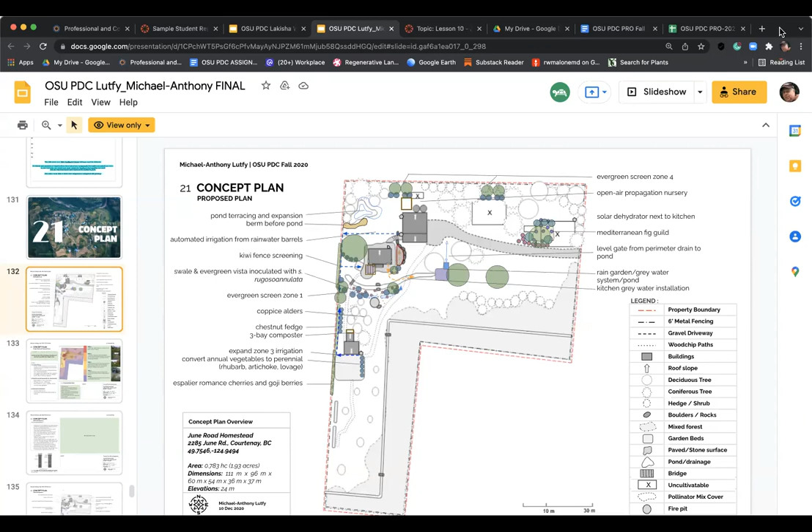Let's just take a look at a couple of examples. So this is one of the past students we had, lives on Vancouver Island here, up in Courtenay. And the first page - you're going to notice, and this is something we're going to be working towards shifting - is some of the examples are not really complete based on the rubric. So I don't see there's a proposed plan, we don't have a look at the existing. So you'd want to place your base map in there prior to your concept plan. But just in terms of a concept, this is a really good example.

So it's showing us some evergreen screening, a little nursery area, some solar dehydration. I won't go through all of these things, but you can see they're fairly general, right? We have a pond, some irrigation out of some rain barrels. Here there's a kiwi fence screening, so that's nice that there's been some specifics placed in that. A little swale and evergreen vista inoculated with mushrooms and some coppiced alders.

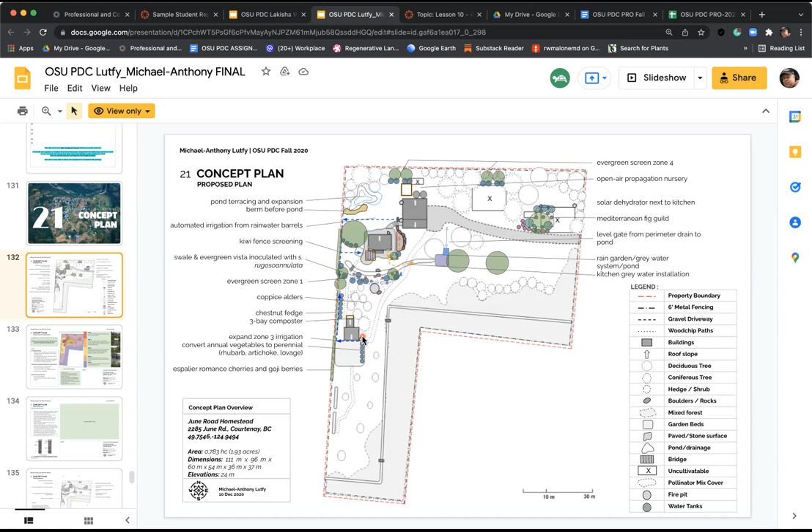So you can see the plan itself is fairly general, and that is in essence what a concept is - we're just looking at that big picture. What are we trying to do here, and where are we trying to do it? You can see here there's a list of the goals and the proposed zones.

We'd have to go back to this person's earlier work to see if this has changed remarkably. But it's very interesting to see right here, this is what we ideally want to see, where we have the main dwelling and zone 1 is tucked in and around it. It can extend out from it for sure, but we wouldn't want to see zone 1 cover this whole area. I think that's going to be a stretch for the homeowner.

You may find that whatever you create in your design here, if you were going to implement it in your own home, be open to some change. This could change quite a bit as you start to assemble it. And I know for myself, having done this a fair bit over the last two decades and more, one of the things that would freak me out most is a client loving a concept and wanting no change. So I like to be given an opportunity to make small changes as we go through. And even when we get into the construction end of it, it's great to have some flexibility. That's a whole topic on its own, the construction, it'd be a whole class on its own.

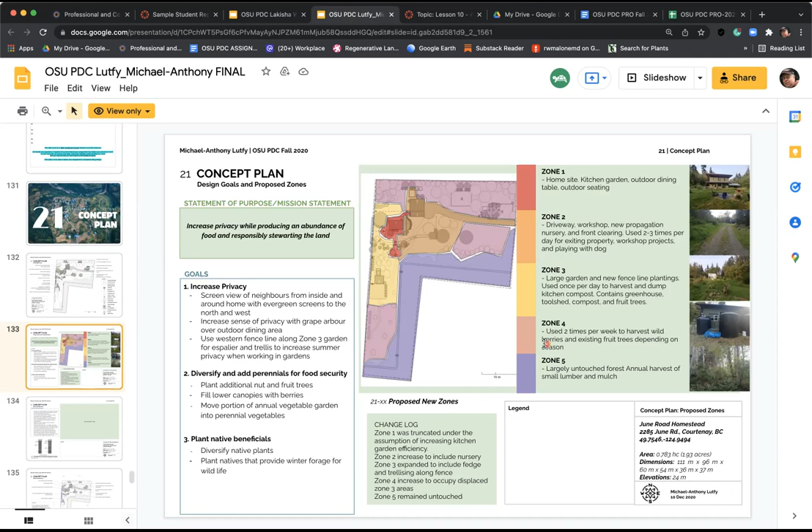Again, this is a nice depiction with some pictures showing zone 1, 2, 3, 4, and 5. So that is wonderful. There's a little bit here on water management.

They've indicated that they want you to look at the next page, but there's some basics here. So 10,000 gallons of collection currently installed, that's very nice to have. And then all these other items - they want to slow water down, use gray water, micro irrigation, some berms, some ponds. So this is a nice strategy here.

And the one thing I'm sure you've all seen during the class is that we're not looking for silver bullets. We're looking for a diverse approach that's going to have a lot of resilience here. In other words, if one of these items had some challenge, you still got all this backup, right? And this has happened to me.

We have 12,000 gallons of rainwater storage, and one spring, all of our rainwater is pumped. We collect off the roof into a small cistern, and it gets pumped to our main storage that's up higher in our landscape. One spring we went to activate our system, and all our water was gone, which was rather shocking. So what happened is we ended up having a leak in one of our main irrigation lines. So if I back up a little bit, we had the water, I activated the system.

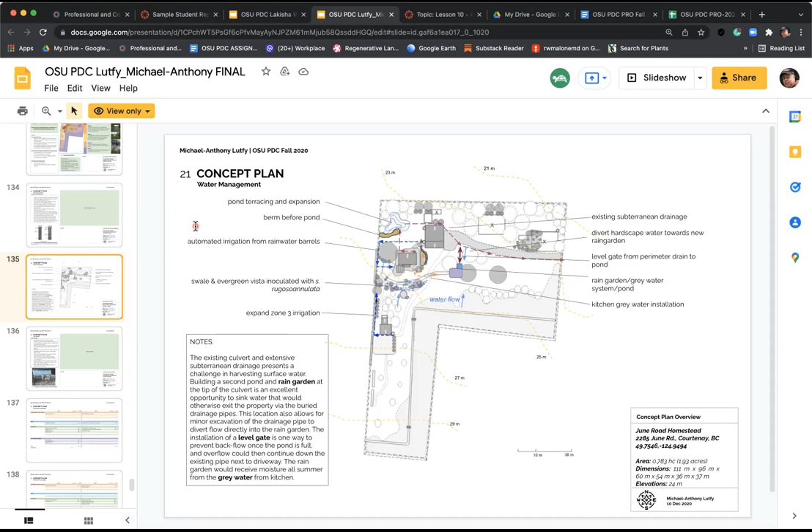You can see there's a lot of different strategies here. So this looks like they already collect rainwater and they're adding more to the mix. And then there's some notes here, some soil fertility plan - so they're going to start composting, and they've listed all these other strategies.

And then a phasing, they go through the various years - year 1, year 2, year 3, year 4. This is a really interesting exercise to go through, especially if you're designing your own property, just getting a handle on how can you execute this. Because especially if you're looking at a larger scale, like Marion, you'd want to do it all today, and that's just not possible. So having it laid out in at least a rough manner like this on how to phase it is really, really helpful.

And it's a good exercise to go through, because if you end up doing this as a professional, there's going to be expectations from your client as to, okay, you've done this drawing, now what? Where do we go now? So you can definitely give them an idea of how they could phase this in, whether it's themselves or whether they're wanting you to help them, if you offer that. And then we go into the permaculture principles.

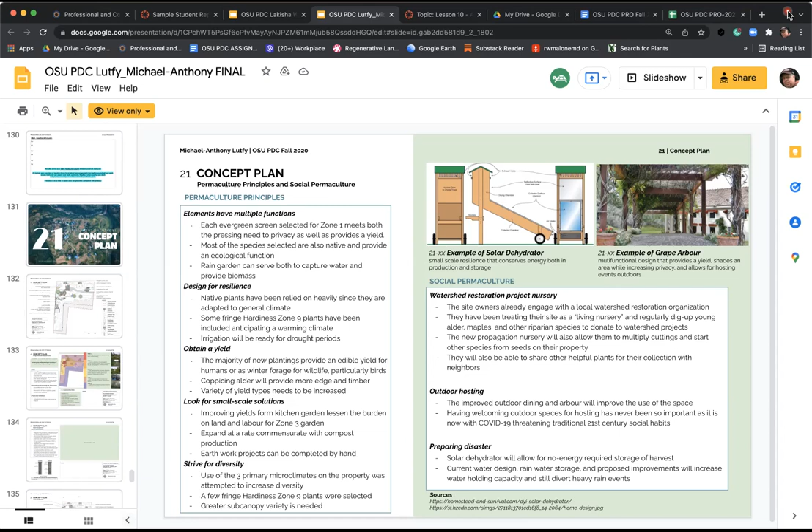And that is about it. They've included the social end here, so there's some good examples that you can reference. Again, be mindful that they may not contain everything the rubric is asking, and we definitely want to take a look at the rubric to be sure you're covering everything that's being asked for.

It does say we want your existing plan map, so put that in there. This is what I use to grade, so if you do not include that, and your concept is awesome as it wants, you'll lose half a mark there. Not that anybody's concerned with getting full marks—I'm sure everybody wants to just come away with the best possible concept plan based on all they've learned.

There are a few resources in here, I believe—a little bit about vision statements, mission statements, and goals, and then that timeline. So there's a little bit of help here if you need it. That's sort of a basic overview of the exercise or the lesson. And there are some questions here, so let's take a peek at some of that.

Okay, so Gregory had a question. I don't think Gregory's here today. Can you clarify zone 1? Is it a place you go every day, even if you're not maintaining it?

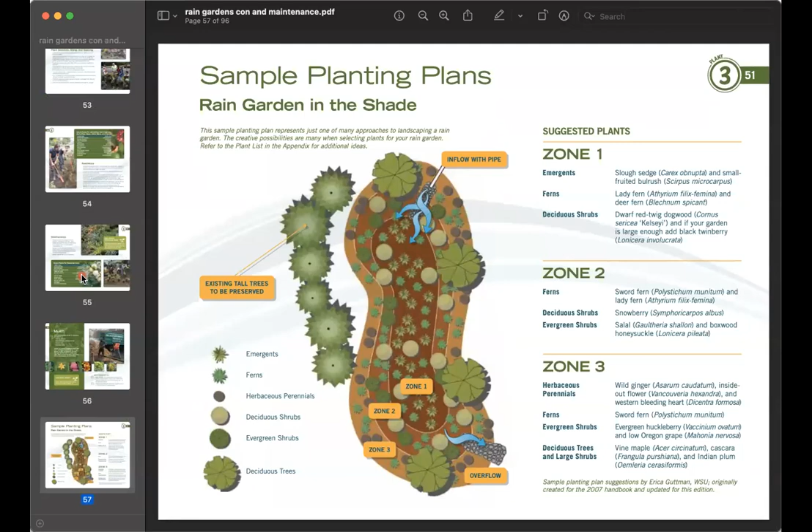Okay, sorry, there was determine sizing. Sorry, I'm flipping through this so quickly, but I am looking for one of the sheets here, which I'm surprised I can't find now. Oh well, I was talking about benefits, and I thought that would be handy for Gregory's question here. That is very, very odd. It's amazing we see some things that when...

Multiple benefits. But there we go.

Because once the contaminant's in water, there's actually no way for that water to purify itself. It needs compost or soil or microbial soil life to help lock up some of these hydrocarbons. So increasing the amount of water, reducing flooding, filtering these hydrocarbons, and habitat, and enhancing your landscape. So I hope that has helped with Gregory's question here.

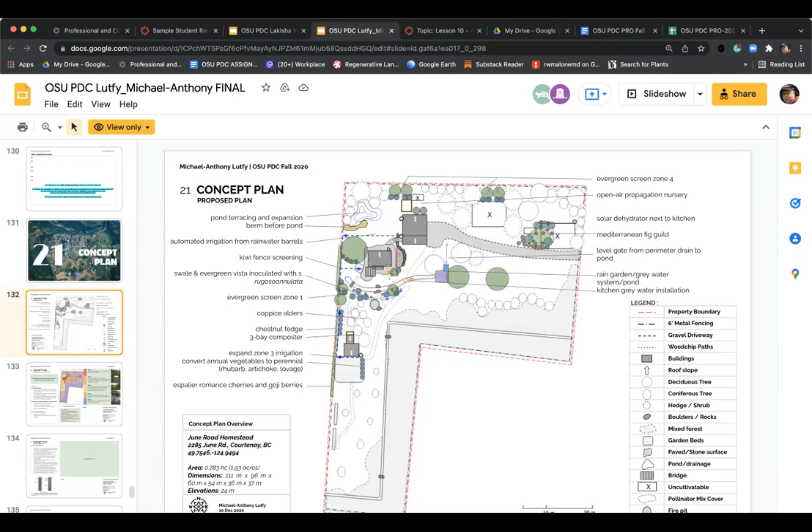Here's another, that's not as good. Yeah, so there's our proposed plan. There you go. So with your question, you'd want to have your whole base map showing, and as well as you can, the elements that you're including, and label those.

Are you thinking about breaking it into pieces for better resolution? Because it's so small, if I don't break it into pieces, it would be hard to draw in every little water barrel or... Well, I would say that if you want, what I might suggest is show your base plan as a whole, and then maybe draw some little boxes or polygons showing that area is going to get detailed in the next slide, or that sort of thing. Does that make sense? Then you get a little more resolution, but it requires more drawing.

Yeah, I know. Well, farm plans are pretty large undertakings. Yeah, they are. But remember, this is a concept, so you don't have to go too far in terms of details. Now, the one thing that I would say with this example that would help is actually having contours showing, and having them very lightly showing, so that we at least can relate some of the plans to the actual topography. That's a great thing to be able to do.

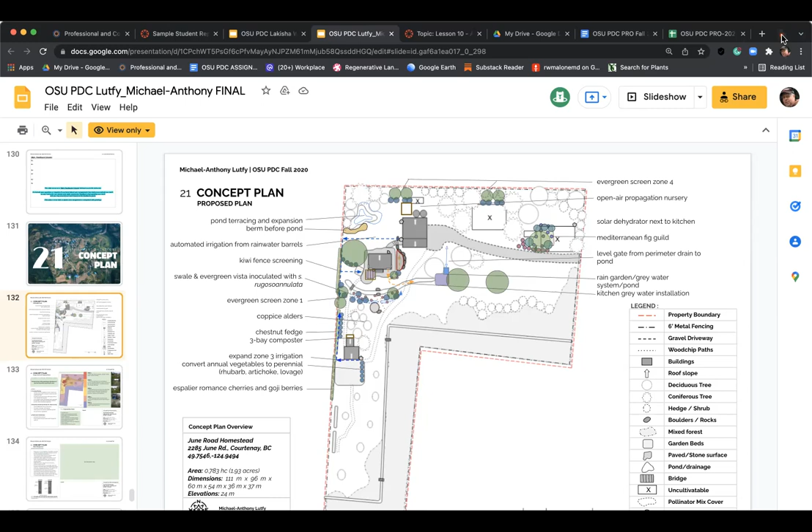Slides: design goals, proposed zones, pathways, fence and gates. What to do here? Well, the goals, I could probably list a few goals that I've picked up with your drawing. An example might be you want to better manage the water on your property. Would that be a goal, do you think? Yes.

Yeah, so the design goals is, again, very broad. I want to increase water holding capacity, soil fertility in certain areas. Maybe you want to expand on the riparian or reduce invasives. I know in your drawing you're talking about creation of a wetland, creation of some water storage. Maybe you want to elaborate on that. Would that be for irrigating? Would that be for fire suppression? That kind of thing would be the design goal.

And really that backs up to the client survey and what the client wants. So hopefully, let's say you were doing this for a client, you have that in the back of your mind as you're going forward. What is it they're wanting to achieve? And have I met that?

The proposed zones, your zones on a bigger property may not really change much. On an urban property, they may change a little more dramatically because often our existing zones—I've seen zone ones that are basically the initial zones showing zone one is just really from the front door to the street, and there's not a whole lot more. But after the student has worked a concept design, there are additional spaces within their property that they can envision they're going to be there every day. Maybe it's a new vegetable garden, or maybe it's a patio area they want to be in for half of the year, that sort of thing.

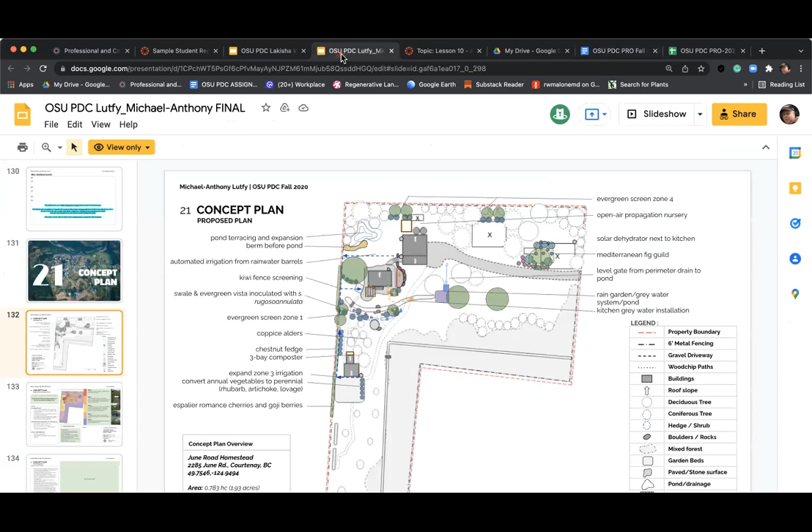Hey Jamie, I was wondering what exactly goes in the appendix area of the assignment? You know, that is a very good question. And I bet if we look at our examples, there's probably little or nothing there. I just see like extra slides or information, slides people were saving to use as a backup, but I don't really see it as a typical appendix like you'd see in a book or something like that. It wouldn't be included unless they were wanting something there, but it's not part of the assignment, so I'm just kind of unsure.

It may be something to benefit you after the fact. Let's go take a look at the master here and see. Right, so I think it's really for your benefit after. So let's say you want to keep everything in one place.

And I know for yourself, this is your new property and you're going to be moving forward. You'll probably change your design a little bit, and I think that's a really good thing, I don't think that's bad at all. But if you come across information that you see is really valuable, this might be a good place to just drag and drop it and save it into that file so you've got it. That's a good question, but it's really for your benefit down the road rather than for today. I mean, if you were designing in rainwater harvesting collection and had a really good idea of the cistern and all the filtration and your pumps and all, you could be dropping them in there. Okay, and great, you may not be there.